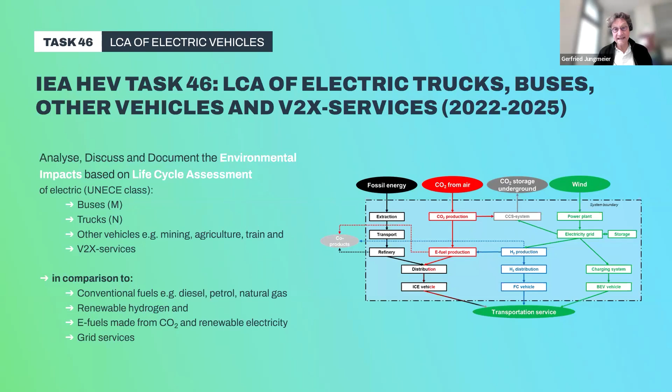On the next slide, you see one of our key approaches, which is covered by the participants in this task. So currently we have 12 official participants and 2 observers. So in total, we have 14 institutions from 14 countries collaborating 3 years together on life cycle assessment to address key environmental issues that are to be analyzed.

On the next slide, you see a special focus of our activity, beside what you will hear today on different impact categories. In this approach, we are also trying to face global warming by identifying a possible new metric on climate neutrality. And of course, we are also facing the second challenge, which is about circularity to close material cycles. So we also put a specific focus on addressing this. This will be mainly covered in our next webinar, which will be taking place in January.

On the next slide, you see that we have defined climate neutrality and circularity, especially for the needs in life cycle assessment. And to make it brief, you can say your system is climate neutral and circular if you only use secondary material, you only use renewable energy, you make no waste and no greenhouse gases.

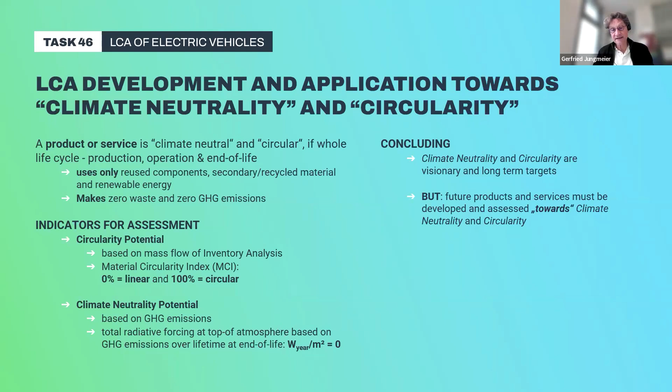Trying this methodology, we have made some LCA case studies. We have finished one on trucks. We have finished one on city buses. We are currently doing one LCA study on V2X services, and we also will consider other vehicles like ships, fire trucks, mining vehicles, always considering greenhouse gases, climate neutrality potential, primary energy demand, circularity potential, and maybe in future also assessing a little bit the criticality of different materials.

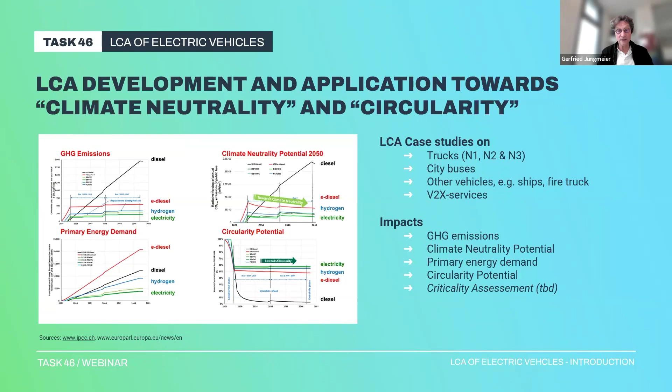And the results look on the first glance a little bit complex, but the only difference to current LCA maybe is that the timing when the different emissions occur is quite relevant for climate neutrality and circularity.

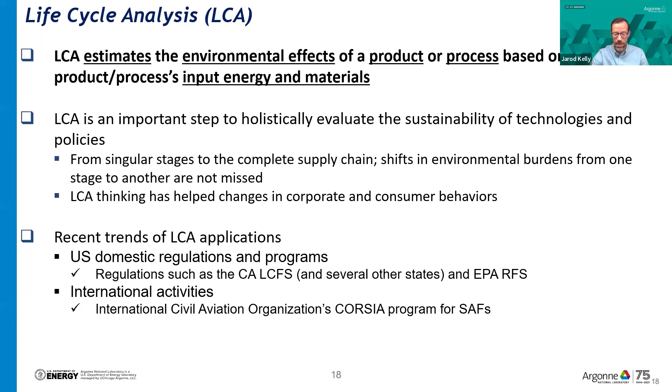So if we move on to the next slide, I'll get into identifying what the elements of an LCA are. We first think about the goal and scope. So this is where we need to define a functional unit.

So this is where we identify, if we're talking about vehicles, per kilometer, per mile. If we're talking about buses, maybe it's per passenger mile. If we're talking about heavy duty vehicles, maybe it's per ton mile, right? And then we have to define the system. What are the boundaries? What's coming in? What's coming out? What are we definitely looking at within our system boundary? That's a really important thing to ensure that we define that appropriately.

Then we have to develop and think about our lifecycle inventory. This is the identification of all inputs and outputs. So we have to measure everything that's flowing across those boundaries, what's coming into the system and what's coming out of the system.

Additionally, we have to identify what is our background data set. This is what we often call the lifecycle inventory data itself, or background data. That background data informs what are the burdens associated with the energy and material that might be crossing those system boundaries.

Then we move into the lifecycle impact categories. This can be things like global warming potential, acidification potential, and so on. And then we have equivalencies. With global warming potential, we have carbon dioxide, but we might also have methane or N2O, and we can put those onto the same basis as carbon dioxide using guidance from things like the IPCC. Then we need to interpret the results.

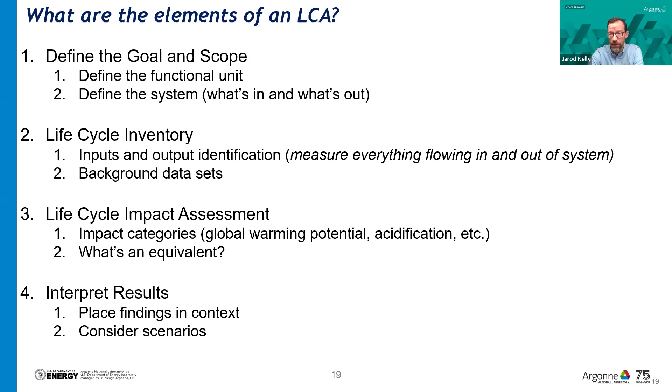So placing these things into context, considering different scenarios. I have a very simplified, relatable example for those in the audience not familiar with LCA. You'll be familiar with cooking pasta. As we think about cooking pasta, we define our goal and scope, and go through what's our functional unit. We want to move from an inedible pasta, the dry pasta, to an edible pasta that's been cooked.

Then we think about the boundary conditions. What are the inputs we care about? We care about the dry pasta, water, and a heat source, be that electricity or natural gas. But what's out? We're not going to consider the lighting in my kitchen, or the effort that went into building the apartment walls. We're really focused on the specific process of cooking the pasta.

The inventory inputs, like I said, are water, pasta, and heat from some source. Then we go through the assessment, where we identify the global warming potential associated with cooking that pasta. The pasta itself had a small amount of burden in producing the dry pasta. The water has some burden from moving it from here to there. And the energy itself, whether natural gas or electricity, is something we have to account for.

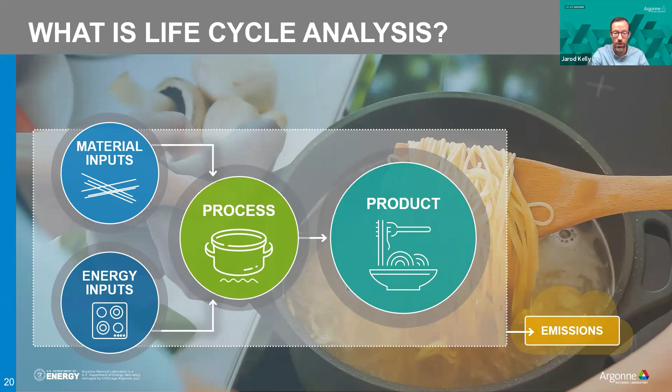If we go on to the next slide, we can look at this more specifically as it comes down to identifying and accounting for all the elements that go into producing petroleum fuels. We can apply these same concepts to the extraction of crude oil through exploration and recovery, the transportation of that crude to a refinery, the refining of it into usable fuel, and then the transport and distribution of that fuel to a vehicle for final combustion.

Along the way, all those stages consume energy, and so we have to account for the emissions that occur during all of those stages. We apply that in thinking about the upstream emissions burden associated with the operation of a vehicle. It's not just the combustion of the fuel in the vehicle's engine, it's also all those upstream activities that we have to account for to get to what we typically call the well-to-wheels conditions.

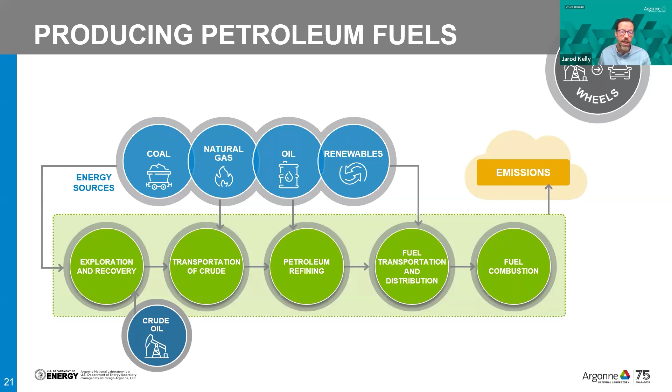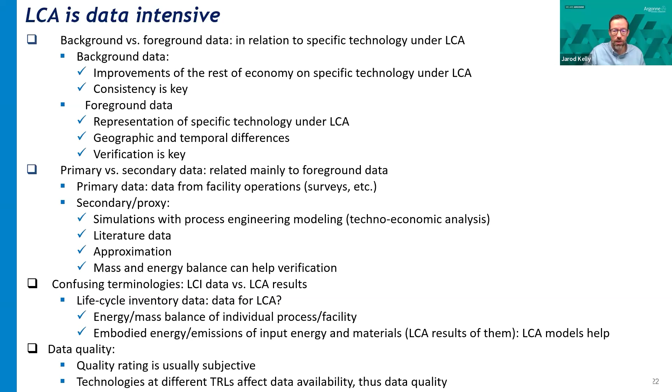There are also many different tools available, both open source and for purchase. And there are also many different data sets, both open source and for purchase. In fact, some of these tools have data sets included in them that we'll look at. But it's important to know that LCA is really a method, and so the tool is not the thing that matters as much as an understanding of the method.

Moving to the next slide, the tool we've developed at Argonne National Laboratory is the Research and Development GREET model, which stands for Greenhouse Gases, Regulated Emissions, and Energy Use in Technologies. We've been developing and maintaining this model for the past 30 years with support from the US Department of Energy. Historically it focused on transportation applications, but it has expanded significantly over the last decade to include many different technologies within its purview.

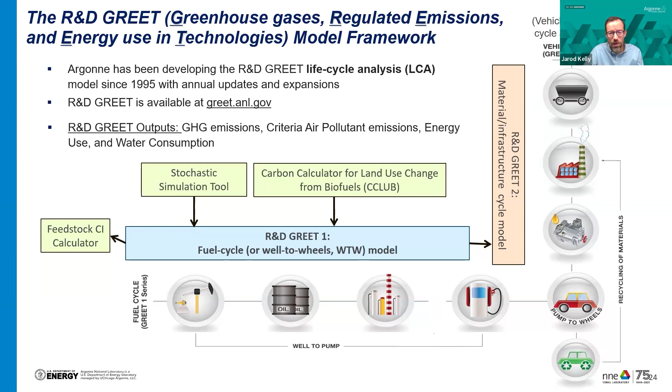If we go to the next slide, I have a very basic layout of how we would conduct an LCA for a given material. I have a silly example where we talk about producing flubber. If we want to produce flubber, we have to go through a flubber production process, so we have to know something about that process. That process requires flubber ore input, as well as inputs of energy, which can be natural gas, coal, or electricity, and materials like sodium hydroxide, calcium carbonate, adamantium, et cetera, and also maybe water. As a product of that, there are emissions, like NOx emissions, SOx emissions, carbon dioxide, and so on.

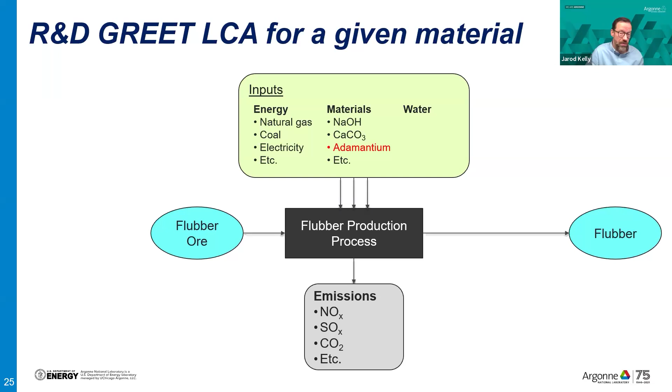But you'll notice in our example, we don't have adamantium in our inventory, so because of that we have to do more work. If we advance, we have to do a little more work to get that adamantium inventory, basically doing the same thing over again. It's also worth noting that we don't have flubber ore just from nowhere, we have to mine that ore. So there's a whole process that precedes flubber ore production, and the inputs associated with that can be energy, materials, and water, and there are emissions associated with that flubber ore mining process as well.

The flubber ore needs to be transported from the mine to the production site and then ultimately to the user. So we have to account for those transportation stages as well.

It's also worth noting that the energy we input has to go through a conversion technology. Just taking a piece of coal and putting it next to your flubber doesn't make it energy, right? It doesn't make it usable. We have to burn that coal to get the energy out, and that's going to be in a specific kind of technology.

You might have a natural gas turbine, you might have a kiln, you might have a boiler. Those all have different characteristic emissions rates when we think about pollutants like NOx, SOx, and particulate matter, and so on.

Finally, you might not just produce flubber. You might also produce vibranium. You might have a byproduct of Na2SO4. How you account for the products and co-products, how are you allocating the burdens associated with that? That's a really big, important area of concern, this allocation.

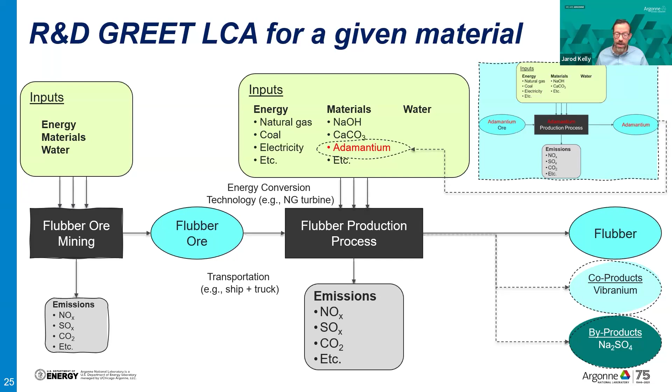We'll use things like the Energy Information Administration's Annual Energy Outlook to inform our understanding of the progression of different energy technologies. We use EPA's eGrid for certain electrical systems, and the US Geological Survey for water data.

And then we move into things like field operational data for oil sands and shale operations, ethanol plants, and so on. When we're developing some of our more advanced technologies, we're looking through simulations and modeling to develop our understanding of fuel production, maybe using Aspen Plus. We might use vehicle simulation from Argonne National Lab's Autonomie modeling to inform that kind of understanding.

We collaborate with other national laboratories in the United States, and we collaborate internationally with a number of different organizations to ensure that what we're doing is consistent with the rest of the field.

I noted that we have a strong background in transportation. This includes a number of different vehicle types and propulsion technologies, including internal combustion engine vehicles, all the way to battery electric vehicles, which we'll be talking about later, and looking forward to hearing what Nick has to tell us about that.

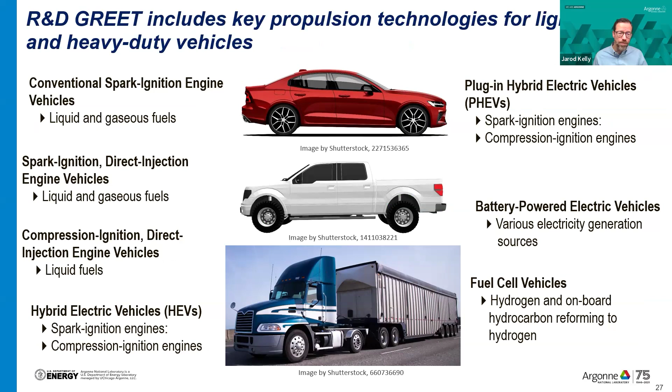One of the things about electricity is that historically, when we're combusting fuels, we think about having to get the fuel out of the ground, go through a conversion technology, and of course it's being combusted in a facility that's been built. But that production burden of that facility is relatively small over the entire lifetime, over the entire energy generated within that facility. So historically, that production burden has not necessarily changed dramatically the burden we see associated with the coal combustion process, for instance.

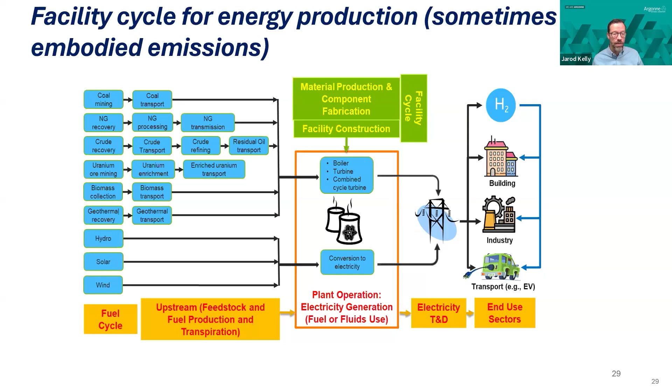However, as we get into renewable technologies—solar photovoltaics, wind power—that production burden starts becoming more important, because there's no combustion technology emitting CO2. So we want to ensure we're accounting for those elements, and in our GREET model, we have included those elements.

I'll talk about the work that we've done in one small example for material production as it relates to batteries specifically. This is looking at lithium.

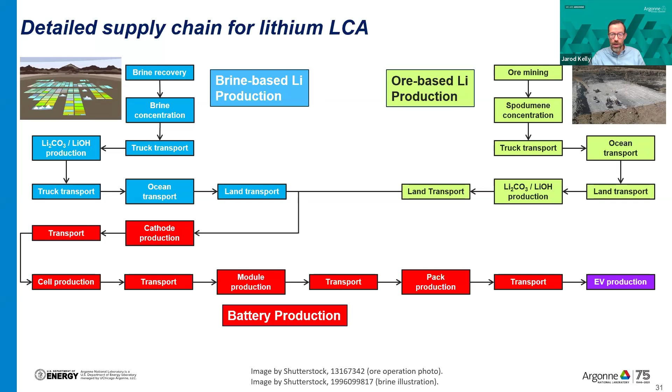A similar process occurs for ore-based production from spodumene: ore mining, spodumene concentration, and so on, until you get to chemical production. So we have to understand all these different supply chain routes.

If we move to the next slide, we use this understanding within the R&D GREET model to do counterfactual studies investigating the impacts of production in different locations, and application of different technologies to those production locations, to ensure we have a strong understanding of how these advanced technologies, especially related to transportation and batteries, will affect the resultant outcome.

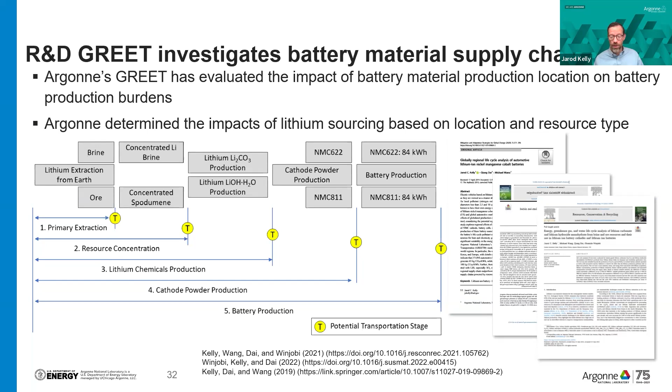And we want to always compare that against a baseline, and right now, that baseline is the internal combustion engine vehicle. If we move to the last slide, I'll hopefully be teeing things up for Nikolas here shortly.

We see that LCA results are subject to variations and uncertainties. That analysis boundary really matters. If we draw our boundary around these vehicles such that we don't account for the electricity or batteries being input into those vehicles, and only look at tailpipe emissions, we're missing something important. So we really need to ensure we have the correct boundary identified within our analysis.

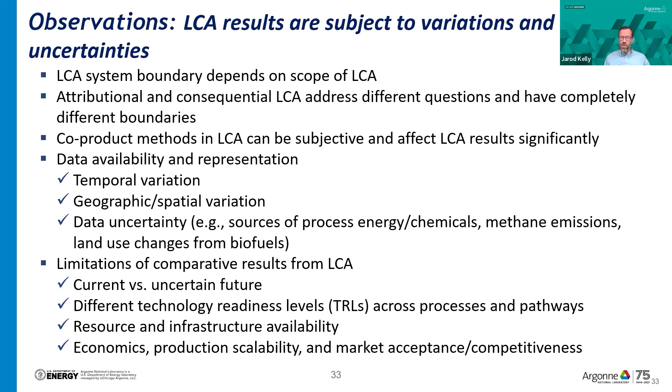There's a lot of really important issues related to attributional versus consequential LCA. I didn't really talk about that here, but it's necessary for us to consider as we discuss LCA's application to broader sectors in policy. With that, I'll turn things over to Nikolas and let him move on.

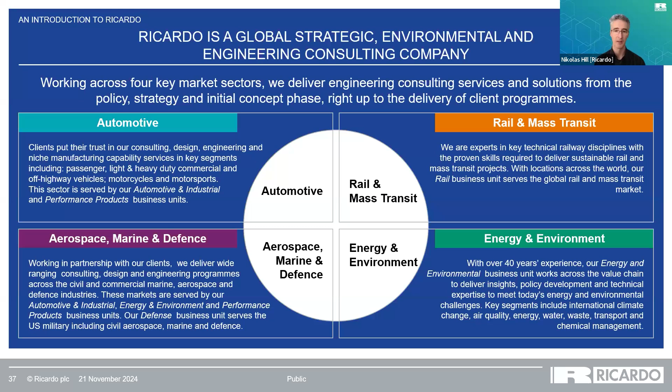Just a bit of background on Ricardo, for those who aren't familiar: we're a global strategic environmental and engineering consultancy company. We work across 4 key sectors, delivering engineering consulting services and solutions from the policy, strategy, and initial concept phase right up to delivery of client programs and products. I work in our energy and environment business area.

First, a quick overview of what I'm planning to cover today. Why are we interested, and what are the key areas to consider in electric vehicle LCA? What are some key considerations for the 4 phases of an EV LCA study, the 4 phases Jarod already mentioned? Goal and scope of the study, again just to underline why this phase of LCA is particularly important, and some considerations there.

Particularly, a focus on battery manufacturing: what are the key considerations for this, and what to consider in LCA of the batteries? How do choices on electricity modelling affect the production and use stage of an LCA? And what are the impact categories other than global warming potential for greenhouse gas emissions, which are also important for looking at passenger cars? I'll also provide a look at other types of electric passenger vehicles and how they compare, and finally sum up with some key takeaways.

Next slide please. So just a quick recap on why we're interested in vehicle LCA at all, and why it's become so important and prominent in recent years. Historically, on the far left, we have policy and regulations focused on tailpipe emissions, and this was quite a reasonable way to assess and target improvements to reduce impacts, since most of the emissions came from the use phase of the vehicle.

However, as we've moved increasingly to new alternative fuels and powertrains, the main environmental burdens are increasingly shifting further towards energy production, the well-to-wheels perspective, and energy policy adapted to that, and now also increasingly onto the vehicle production stage.

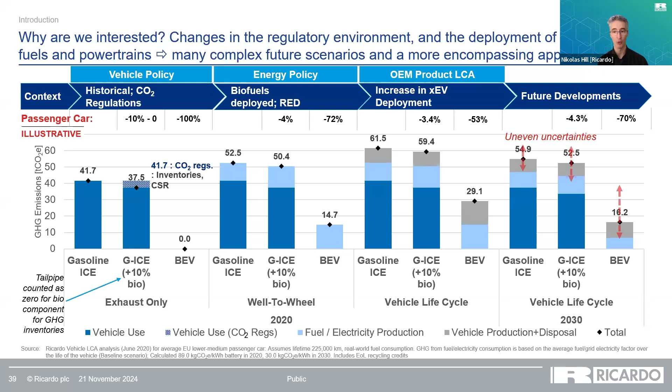So the final set of bars on the far right, and this has meant that providing a fully encompassing and holistic picture using a life cycle perspective is so important, so that it's critical to ensure that we capture all the major impacts on a fair and balanced perspective, so that they can be assessed and also reduced and acted upon as we strive to achieve our long-term goals to mitigate climate change and also other significant environmental impacts.

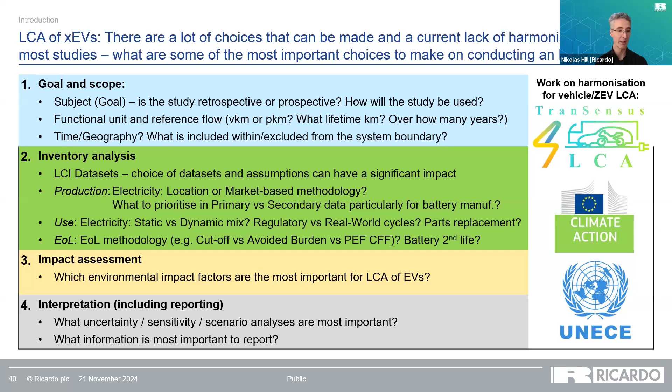So, just moving on to this goal and scope phase, again, just to emphasize, this is a critical first part of an LCA, and it's important to realize that it can have a significant influence on the choices made, which can affect the outcome.

From a vehicle level perspective, we can consider two broad types: the retrospective, for example, product environmental reporting from a vehicle manufacturer for a model they're putting on the market. Or it might be a prospective type LCA study, for example, a policy analysis study that's looking forwards to see how changes in the market, the wider energy system and production of vehicles could change in the future, and how that might affect how the impacts look further down the line.

So these kinds of decisions, and also things like the boundaries, can result in very legitimately different decisions and data sets, and also involve setting clear system boundaries for the study, what's included and what's explicitly excluded from the assessment.

Right, yeah, you've anticipated. Next slide, thank you. This slide, thank you.

So just moving on, in terms of the battery focus, once the goal and scope is set, we move on to the inventory. And for electric vehicles, the modelling assessment of the traction battery, not surprisingly, is very important, particularly for pure battery electric vehicles. So what are the most important considerations and choices here?

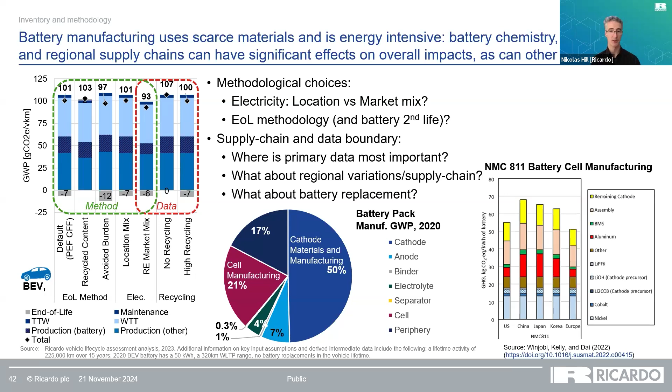And finally, also consideration of battery lifetime, possible replacements for some types of vehicles, and the possibility for reuse or second life use can also be important to consider. Next slide, please.

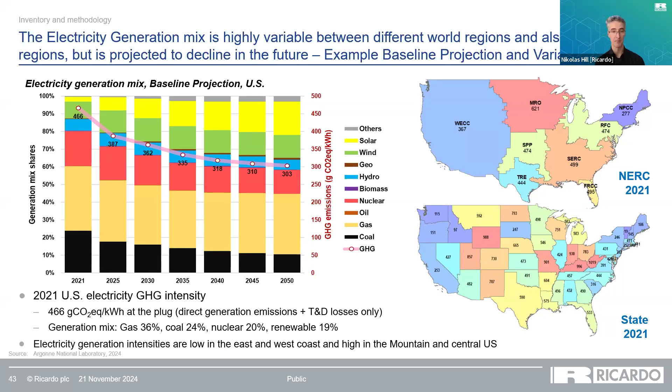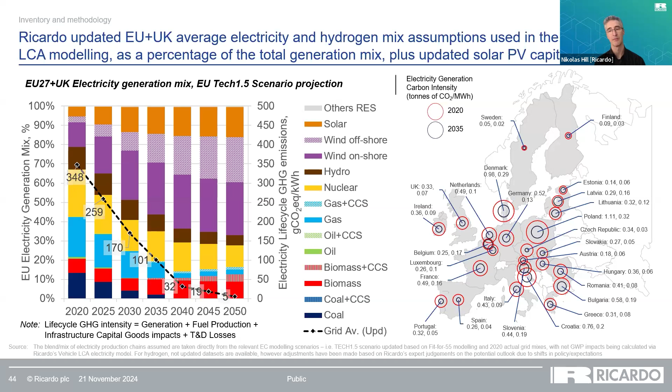Next slide, please. So the situation is similar and also highly variable within Europe, where due to policies in place, as well as longer-term objectives for reaching net zero by 2050, ongoing improvements in cleaning the grid and decarbonising electricity are projected to continue and be even more rapid. And this makes accounting for this change especially important for EV LCA. Next slide, please.

So, apart from regional considerations, let's focus a bit more on the dynamic electricity and use phase. The choice on how to model use stage electricity has a significant impact, as I said. Historically, some studies have used static mixes, assuming no change in the mix over time. However, using a dynamic mix based on conservative projection, based on enacted policy and regulation, is demonstrably far more accurate.

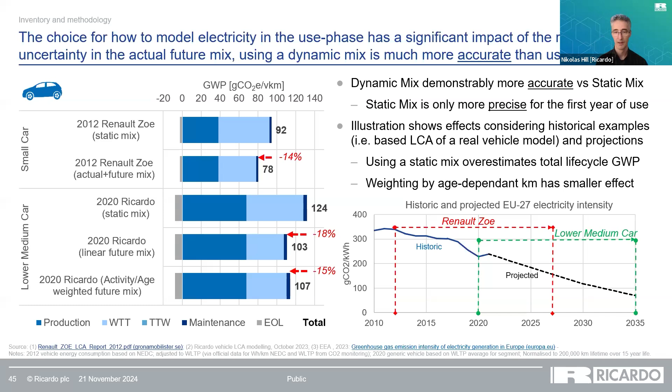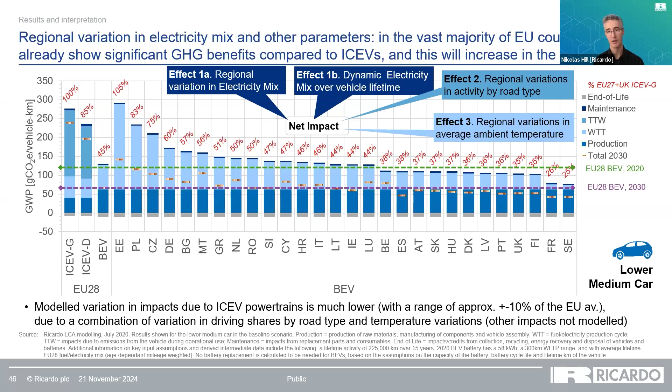And besides the electricity mix and future projection, this analysis also accounts for things like regional variabilities in driving by different road types, which have an effect on energy consumption, and also variabilities in the ambient temperature, which can have a significant effect on EVs. Regional variations have a much lower effect on conventional vehicles. And the analysis shows that even in countries with less decarbonised electricity mixes, the savings compared to conventional vehicles are significant across most countries for battery electric vehicles.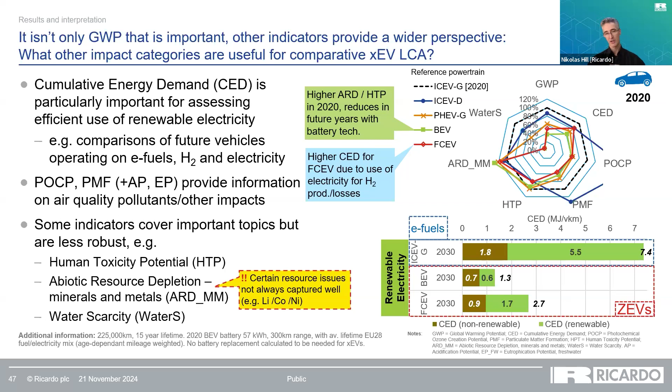The other caveat to be aware of is that such analyses generally don't capture well the differences and impacts due to more localized pollutants, particularly, for example, air quality, which is particularly important in urban areas, whilst LCA tends to capture impacts from a global perspective. Next slide, please.

So we've looked a bit at passenger cars and some results and talked about those. What about other passenger vehicles? How do buses and coaches compare? These contrast to an extent because they're quite different in terms of the kinds of cycles that they use. Now, the figures here illustrate our previous analysis on the future outlook for urban buses and for long-distance coaches.

As perhaps is expected, electric and other zero-emission urban bus technologies show particularly high greenhouse gas reductions compared to other powertrains due to more favourable urban performance and range requirements, which explains their rapidly rising deployment in the marketplace already at the moment. However, electric coaches also show potential for significant benefits in the medium and long term, despite relatively less favourable driving cycles and longer range requirements requiring bigger batteries, so larger production emissions. Next slide, please.

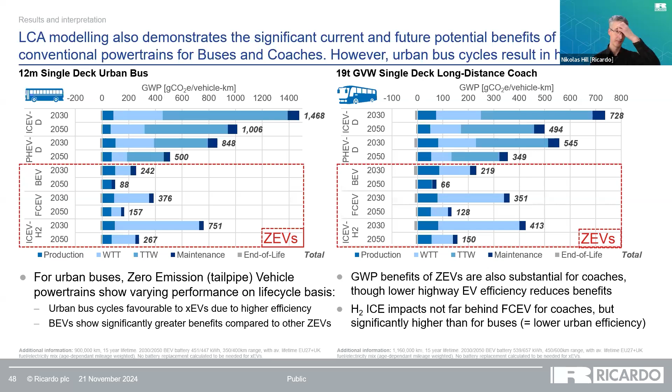As a final slide before my conclusion, it's also important to assess and understand the impacts of key assumptions and conditions on the overall result. Here I have a short list of some of the most important or cited considerations affecting EV LCA, and also comparisons with conventional vehicles and powertrains. Those items highlighted in dark blue being most influential, like energy consumption and energy production mix, and those in light blue having lower impacts on the final result, at least for comparisons between EVs and conventional powertrains. In some cases, the light blue items can result in more significant impacts when comparing between different EV models, but generally they have a lower impact on comparisons with conventional powertrains.

I won't go through all of this list in detail since we've touched on a number of these topics already, but to briefly cover some points not yet mentioned: assumptions on driving cycle and energy consumption are especially important, and doing sensitivities on these can be valuable. Compared to regulatory testing results, real-world energy consumption is usually significantly higher on average for all powertrains. Since EVs generally have much lower use-stage impacts versus conventional vehicles, real-world accounting provides a more realistic but also more favourable comparison for EVs.

Similarly, for lifetime activity, higher activity overall reduces the importance of production impacts, while lower activity increases them. So having good real-world assumptions on these use cases is important to provide the right kind of decision-making and understanding of results.

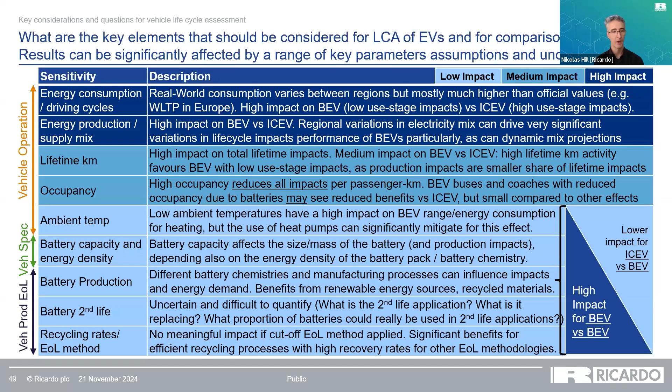Final slide, please. So what can we learn? What are the key takeaways?

Again, to reiterate, LCA is complex. I probably don't need to keep saying that, you've probably gathered that. The need for standard product category rules is needed for vehicles, but progress is being made, and there should be standardized methods available later in 2025.

Goal and scope is particularly important, and the choices here can affect the outcome significantly. It's also important to clearly define assumptions to understand the results and to use data sets based on real-world applications, both for the production stage and the use stage. That's important for a fair, unbiased and accurate result and for comparisons between different vehicle types and different models.

Also important, looking more widely than just greenhouse gas, it's important to get a complete picture, and especially, as I noted, understanding cumulative energy demand.

Finally, what can we learn from LCA in terms of maximising the benefits and minimising impacts for EVs? First, the consequences of design and the use of the vehicles: right-sizing the batteries for their particular application and need. Do we need to drive 500 miles on a charge? Is that necessary? Because smaller batteries mean smaller production impacts, also lower in-use energy consumption as the vehicles are lighter. And also factoring in the balance of priorities over the entire life cycle to avoid making decisions that have adverse net impacts.

Maximizing renewable electricity in battery manufacturing, optimizing the supply chain, using recycled materials and designing batteries for recycling to maximize the recovery of materials at end-of-life, and also ensuring there are policies in place to make sure that happens. And also looking at reuse or second use of batteries. All of these things can help reduce net impacts.